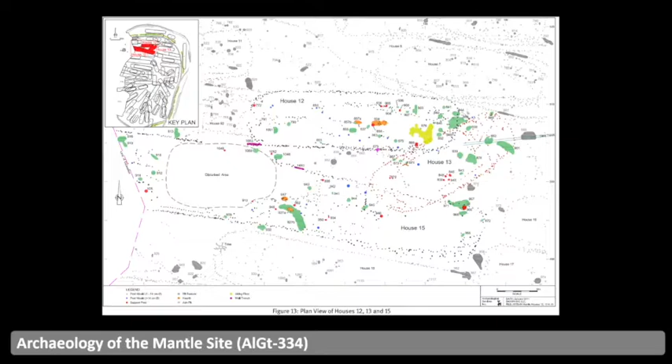With the data collected, the game development team, made of individuals from Sheridan College and Toronto Metropolitan University, collaborated in developing a digital model accurate to the site. Using GIS data, height maps, and drawings from the Mantle Site report, the team created the environment using digital tools such as Unreal Engine, Houdini, and Autodesk Maya.

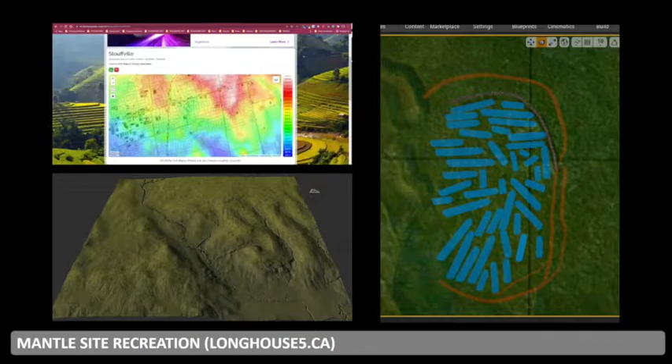With the development of the Mantle Site complete as an entire city that one can walk through in digital space, the architecture team has utilized the model as an educational tool by comparing the macro and micro details of the Indigenous Longhouse with macro and micro details found in contemporary buildings. Elements such as heat, air, moisture, structure, programming, and circulation were the details of focus.

The detailed recreation of the village offers a simulation for architectural education, where architects and archaeologists can use visualization as a medium for discussion. Subjects from construction practices to the assemblage of the longhouse structure were discussed and proposed through relation to methods of construction today.

The simulation showcases the daily activities on the site, from how the Indigenous space would need spaces for drying food and meeting as a group, suggesting that these spaces needed to be planned by the village. In terms of assembly, discussions question how the structure would look disassembled and how it was assembled during seasonal relocation. To begin, we will look at the details of heat consideration and usage within the longhouse.

In this drawing created from a digital model, it showcases the central axis of the longhouse, where fire pits used for cooking and as a heat source gather people together within the hearth. The heat sources are placed beyond the vestibule and are placed at the floor of the main living quarters.

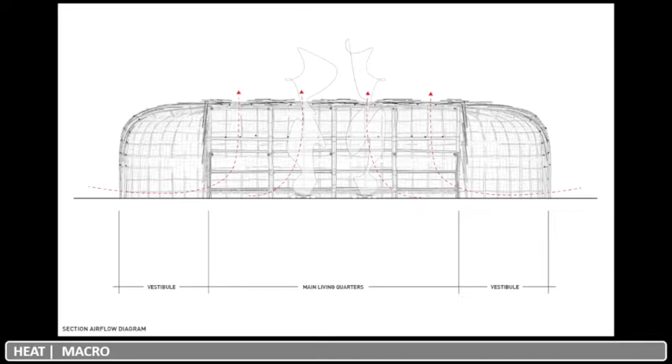Within the in-game demo, smoke can be seen exiting the exterior openings of the longhouse roof, and on the interior it showcases the placement of the fire pits and the openings directly above, acting as a light and heat source in the center of the longhouse, allowing for gathering to take place around it.

Sluice Point by Omar Gandhi, located in Nova Scotia, consists of an open programmable space with flexible elements such as sliding panels and a central rotating fireplace that allows for the center of activity to shift as needed. The wooden millwork contributes to the warmth of the space as well.

Similar to the longhouse, the essence of a hearth is still utilized today in contemporary homes as a means of heating the space and as a place of gathering, as a fireplace is located within the living space.

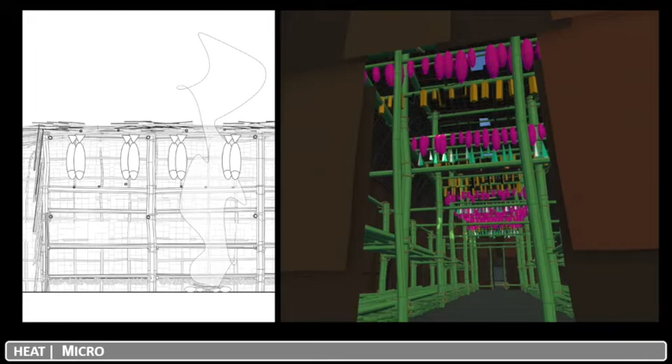The use of drying racks, a common First Nations method of preserving food, near the opening utilizes the flow of heat as a technique to preserve food.

The items are hung from the interior structure and follow the horizontal layout of the structural members. Used in coordination with the fire pit heat and smoke, the drying racks were ultimately placed at a higher elevation.

The in-game demo features an in-depth view of textured models of hunted, harvested food for occupants of the longhouse, and in addition, post placement to the opening within the roof is unobstructed, allowing for smoke to head out of the longhouse.

On the micro level, in contemporary architecture, the Daniels Building by NADAA utilizes a highly efficient water-based air conditioning system alongside a rainwater recovery system and green roof as a means of cooling the building.

The building therefore embodies many sustainable features that utilize stormwater management strategies, and ventilation is configured to give access to a natural cooling system with vents in the roof designed to be released.

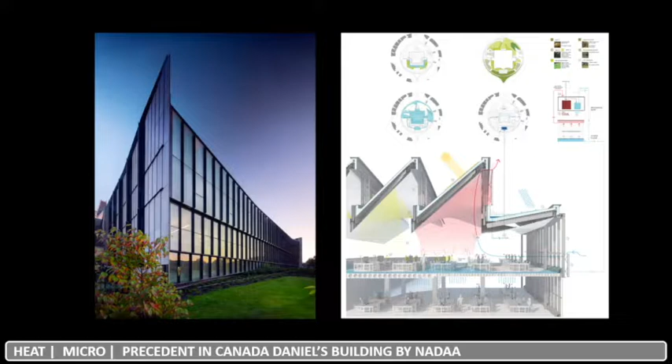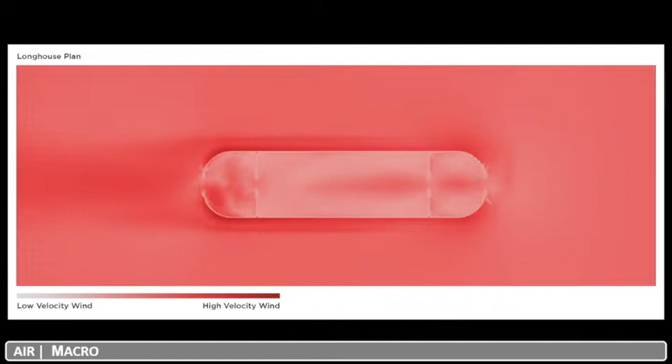The airflow through the longhouse is streamlined by two openings on either end. In plan, this CFD simulation shows the velocity of wind flowing through the longhouse, and the curvature of the longhouse lessens the lateral wind loads parallel to the entrances with the vestibule, stopping an incremental amount of airflow before the main living quarters, and also preventing wind loads from affecting the occupants inside.

Gaps in the roof of the longhouse lie above the fire pits to provide adequate smoke ventilation. The doors at both ends of the longhouse, alongside the roof gaps, create a cross-ventilation system to ensure that air is being circulated throughout the structure.

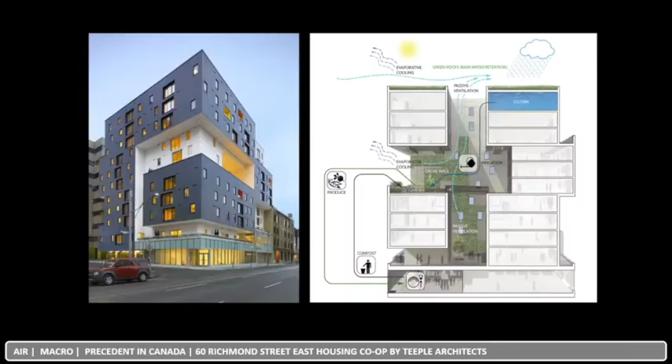The 60 Richmond Street East Housing Co-op by Teeple Architects also creates a passive ventilation system, in which fresh air is constantly flowing through the vertical chimney located in the core of the building.

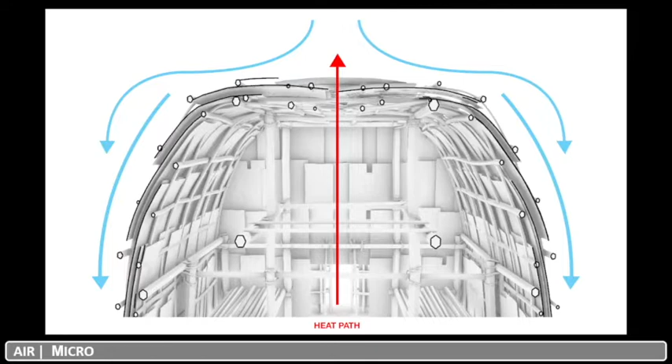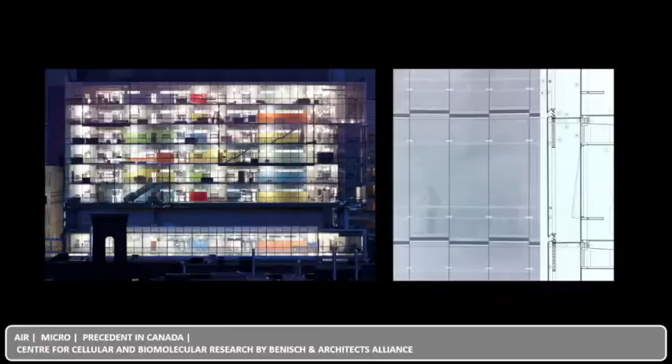The Centre for Cellular and Biomolecular Research by Behnisch and Architects Alliance utilizes a double-skin facade system to employ natural ventilation that acts as a chimney to circulate air. The operable windows are located on the interior skin of the facade, while operable vents help ventilate on the outer skin, allowing for natural air circulation.

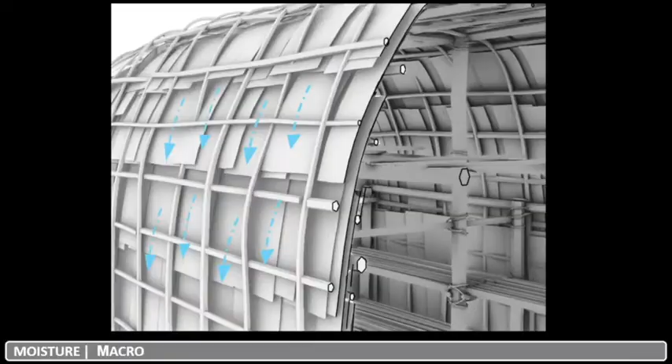The convex shape of the longhouse, like a pitched roof, allows for water and snow to run off the structure. This way, the geometry of the roof prevents water from seeping through and leaking into the longhouse.

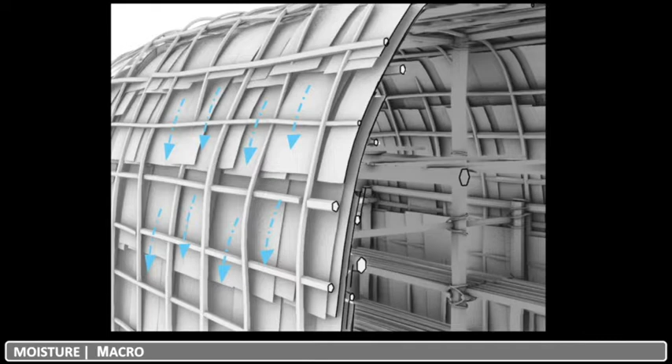In-game, this cladding is shown through textured bark held within an envelope cage. Looking at a similar example, the Snowboarder's Cabin by Scott & Scott uses locally harvested red cedar cladding on top of an A-frame structure, which allows the building to shed snow and water effectively. Both projects take advantage of the same water shedding principles.

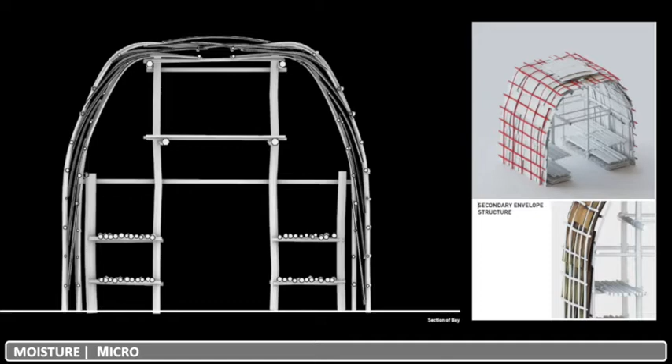Water infiltration is mitigated through the overlapping condition of the bottom and top layers of the envelope. Bark is first layered on the bottom and then built upwards in order to overlap itself. This technique takes advantage of gravity in order to deter water.

This in-game example shows the overlapping layers of bark from both the inside and outside of the longhouse. Because of the layering, little room is left for light or air to infiltrate the longhouse.

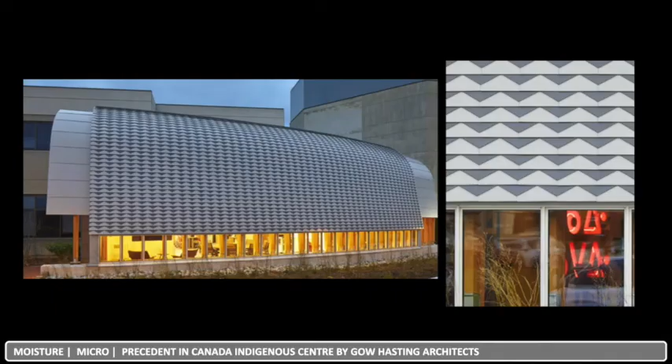Looking at the Odeyto Indigenous Centre by Gow Hastings Architects, we can see the same overlapping techniques being used in order to prevent water from damaging the exterior envelope. This campus building at Seneca College is a gathering space for First Nation, Métis, and Inuit students, and its convex shape is inspired by the Haudenosaunee Longhouse.

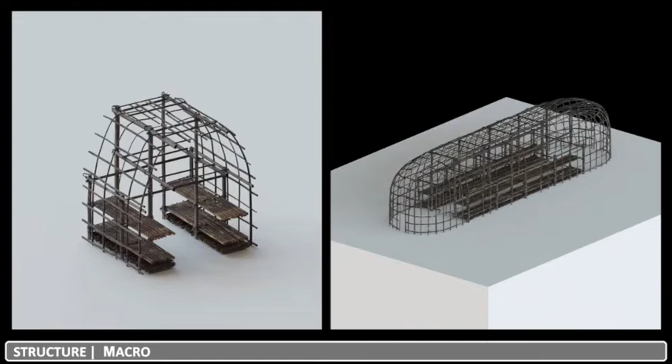While the curved external structure of the longhouse only works to support itself, the internal structure supports a majority of forces exerted onto the longhouse by its occupants.

The contemporary office building works in a similar fashion, with its occupants being structurally supported by an internal core and its facade working to separately support itself through a curtain wall and mullion system.

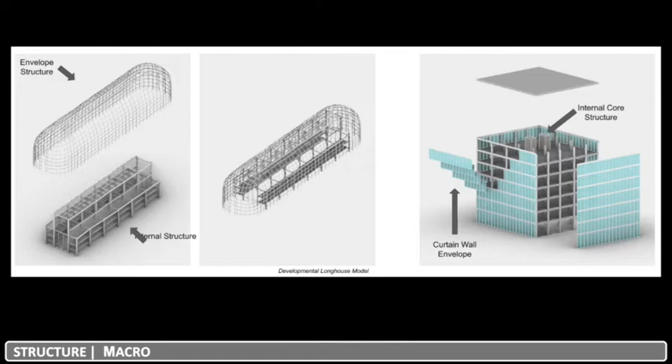The structure of the longhouse is displayed in-game through a series of adjacent structures. The internal structure is displayed first, then the self-supporting envelope system followed by the bark enclosure. The final secondary structure layer is then added in order to operationally maintain the longhouse throughout its life.

The same construction principle is also shown in contemporary buildings today. The Toronto Dominion Centre by Mies van der Rohe is constructed using an internal core that supports the primary structural elements of the building, like floors. An external curtain wall system, which supports itself, encloses the building on its exterior.

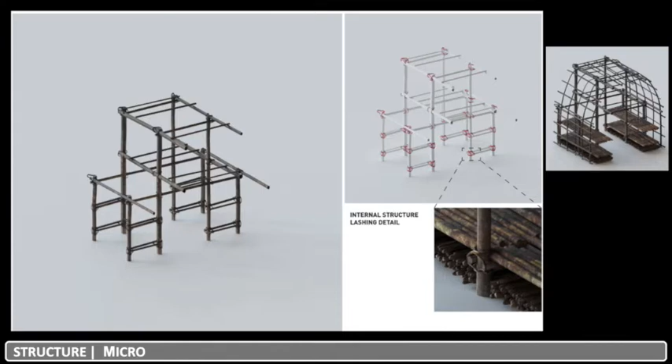The internal structure uses a lashing technique in order to hold structural members together. The lashing also acts as a flexible joint, which gives way for the longhouse to deform over time, without cracking due to the surrounding changes in temperature.

As seen in game, lashing connections can be examined at an eye level in order to understand how the structural members are coming together.

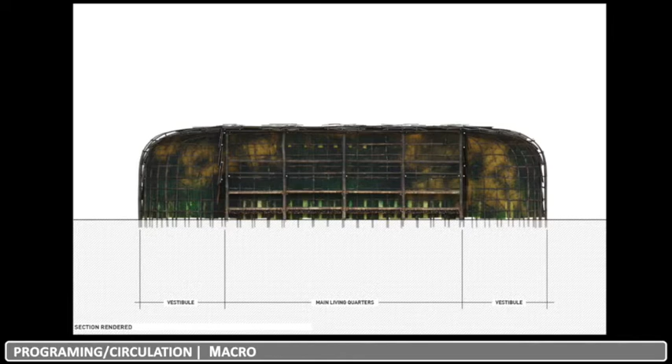Looking at it from a programmatic point of view, the layout of the longhouse is also similar to that of contemporary buildings. The longhouse has a vestibule located at each entrance with the main living spaces further beyond them. This linear layout allows for a progression of spaces which utilize storage and utility before continuing to residential spaces.

As seen in game, the player walks through the interior condition, showcasing the placement of goods, foods, utility items, and residential areas within the longhouse. The same principle is also true in the contemporary home,

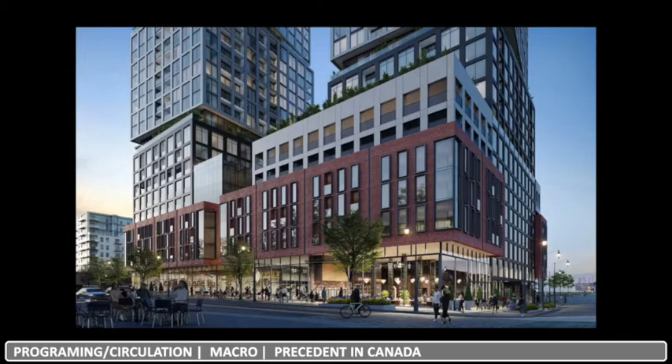which sees a mudroom or vestibule at the entrance where occupants may remove belongings before entering living spaces such as the kitchen or bedroom. Looking at a contemporary tower, this principle is still true at a larger scale.

With a modern condominium tower in Canada, the program of the building is laid out vertically, with public and private spaces being separated. The lower podium holds the functions like gyms and amenities, while the upper portion of the tower holds residential functions.

Another programmatic element is the organization of firewood beneath the lower beds in order to dry the hanging goods above. This layout shows an understanding of programmatic organization with correlation to the mechanical function of the longhouse.

As shown in game, a detailed layout of material goods is rendered according to its purpose in the longhouse. This presence of sequencing also occurs in contemporary malls such as the Eaton Center by Zeidler. Progressive programming from exterior to interior crosses through vestibules and corridors to end up in the individual stores.